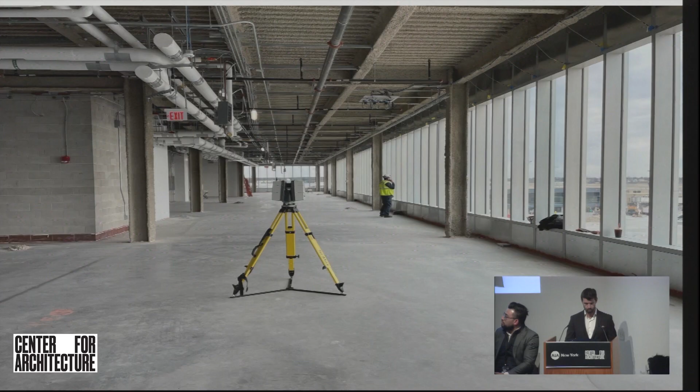The scanners we use are based on what we call line of sight. These scanners are not X-ray—they can't scan through walls or ceilings to see how buildings were constructed, but they take highly accurate measurements and have a very long range. Scanners are moved around to different parts of the building to get the coverage we need. The simplest way to think about it: if you were standing in a room like this, what you can see with the naked eye from this spot is exactly what the scanner will see. So we move the scanner around until we get the coverage we need, whether interior or exterior.

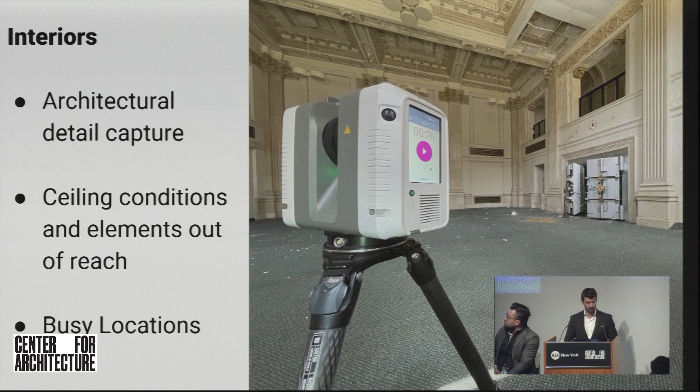Now the scanners can scan in pitch black. They don't need ambient light in order to capture the level of detail that we're looking for. To take photos, they would require ambient lighting, and it's important to understand when we have a conversation with our clients, what are we looking for? Are we interested in photography as well, high definition imagery, as well as capturing the detail to build our drawings? It's important to understand up front so that we understand the type of lighting conditions that we need and what we're looking to accomplish with that particular scan.

So, keeping this to 15, 20 minutes so we can focus on the presentation, but that's a quick overview of the way the scanners work, okay? How we deploy them in the field, what we can scan, what we can't scan. So that hopefully gives you an idea of phase one in terms of collecting the data.

Once we have the data, what we're left with is what we call a point cloud, and that's exactly how it sounds. It's just a collection of points, millions of points in space. Those points don't know, however, if they're part of a wall or a door or a window or somebody who walked in front of the scanner at that time. We just know that we have an accurate measurement with an accurate XYZ coordinate, and that is what we're using as our guide to go build those drawings or build that Revit model.

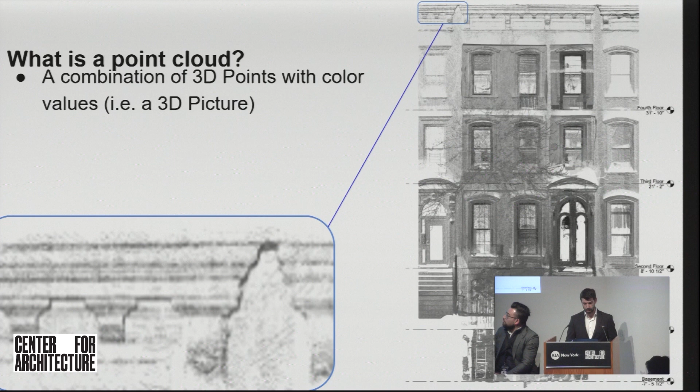Quick example of a site scan. What you're looking at there is the point cloud overlaid with the photos, in this case in color.

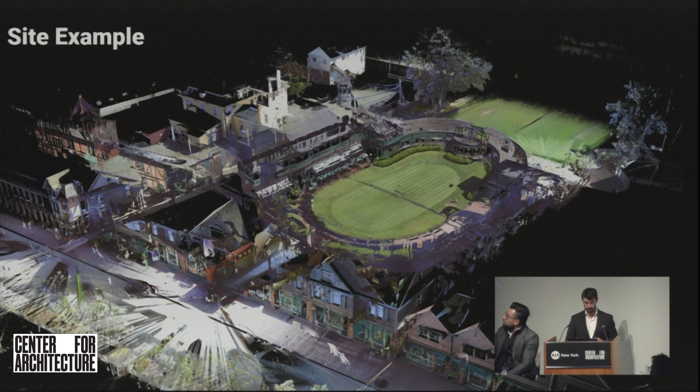So once we've scanned the building, we have the point cloud, we have to go through a process called registration. That's where we get the data cleaned up. We remove anything like reflected surfaces, anything the scanner captured that we don't want to see. We get that ready to model and bring into Revit or CAD. That's a process called registration, and I'm not going to spend too much time there. That's more behind the scenes. It's an important step. It's something that we do internally, but there is a middle step before we go from scanning to production, and it's important to understand that.

There is no magic button, so to speak, that turns a point cloud into a set of drawings. This is still being done one wall, one window, one door at a time. If anyone has questions on when that is coming, I'm sure in the near future, but as of now, not as of yet.

Multiple different file formats, the files that we can provide to clients. Not everyone is using Revit and AutoCAD. Some are using programs like SketchUp, Rhino, Vectorworks, ArchiCAD. So we have the ability to import into different software platforms.

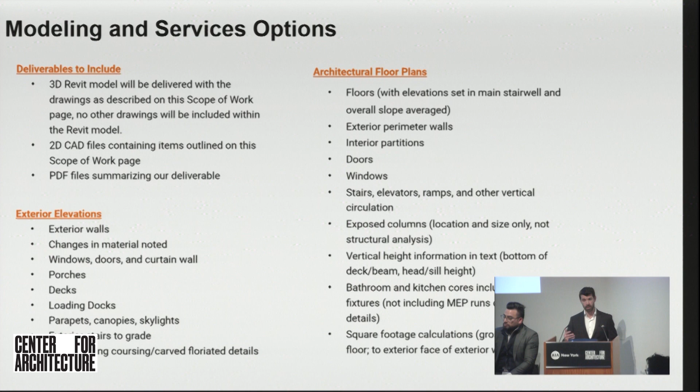Six months later, I might get a call and say, Paul, that building we asked you to scan, I know I only asked you for floor plans, but we need the RCPs, can you do that? We don't have to go back and rescan. We have that data and we have it forever. So we can always add on to the model later on down the road, depending upon if you're unsure what you might need at the time.

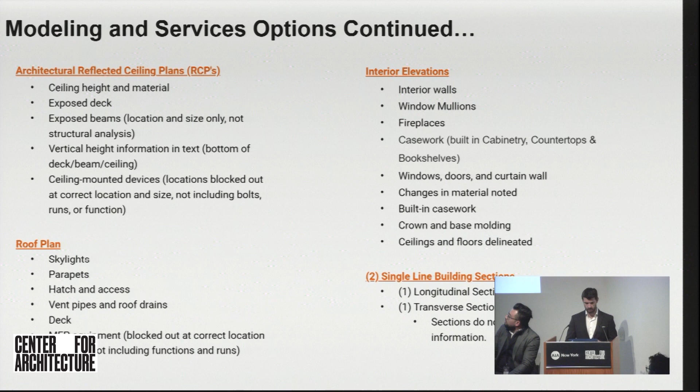Reflected ceiling plans, elevations, sections, roof plans - this is all part of our different deliverable packages. So you choose your menu, so to speak.

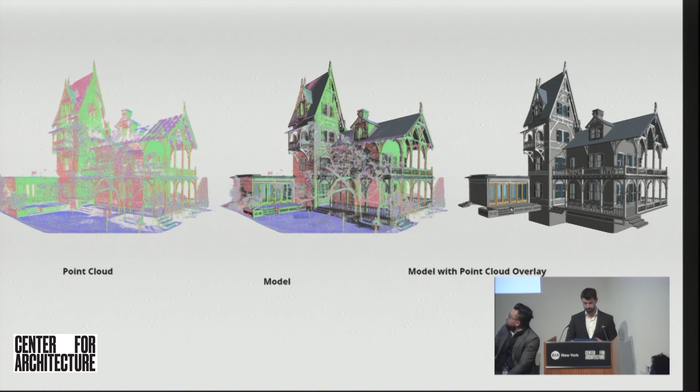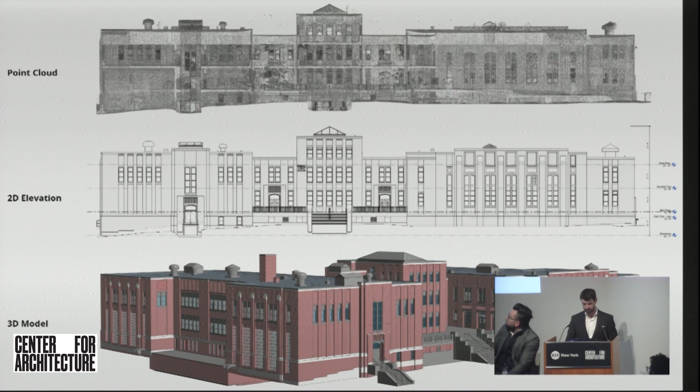Some examples of point cloud, and then modeling, and then overlaid with the color data. Some examples of elevations and how we move from the point cloud all the way up to a 3D BIM model if required.

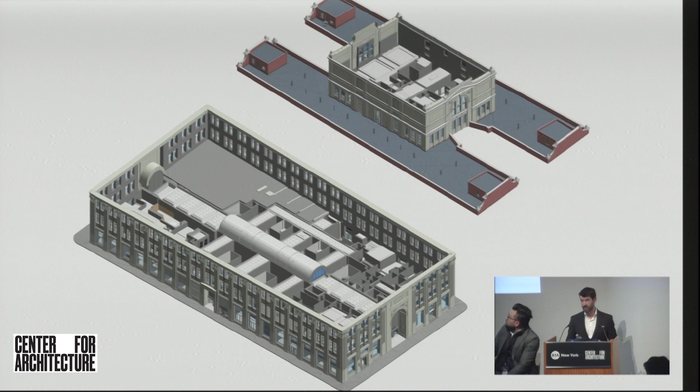I'll show you a couple of examples on building information models here. LOD, important, I'll mention that. Generally speaking, our standard offering, we model to about LOD 300. But again, that's up to you. Most of our clients are acceptable with that level of LOD, but if we need to go higher, we can always do that.

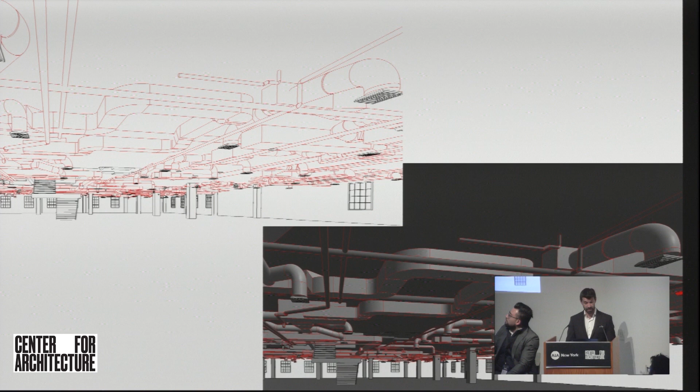MEP, we do a lot of MEP modeling, be it above ceiling or below ceiling, and with the integration of our parent company, GPRS, we now have the ability to do extensive MEP modeling. We're doing a lot more of that lately as well, both above and below ceiling.

Some examples of historical preservation work. We do quite a bit of work for projects that require LPC approval, and we'll talk a little bit more about that when we get into the drone survey.

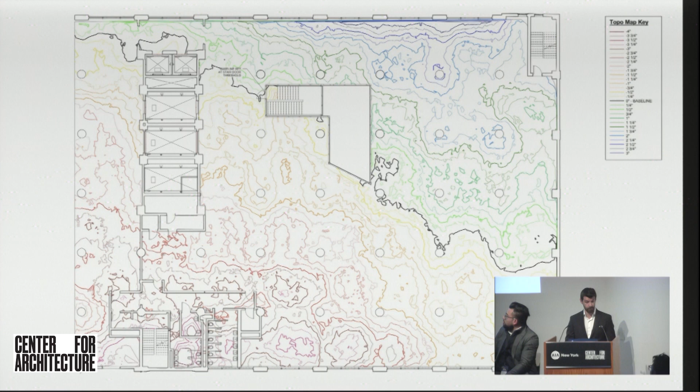Deformation mapping, that's another deliverable that we offer our clients. These are topography maps, so to speak, where we can do floor flatness analysis. As long as the floors are clean and broom swept, we have the ability to scan the floor slabs and then produce topography maps showing different tolerances depending upon what the client's looking for. This is often used for lab spaces, situations where we're really placing a premium on floor flatness. We can offer this for the slabs as well as the walls - same concept applies, just on the walls where we can show you where the deformation is taking place.

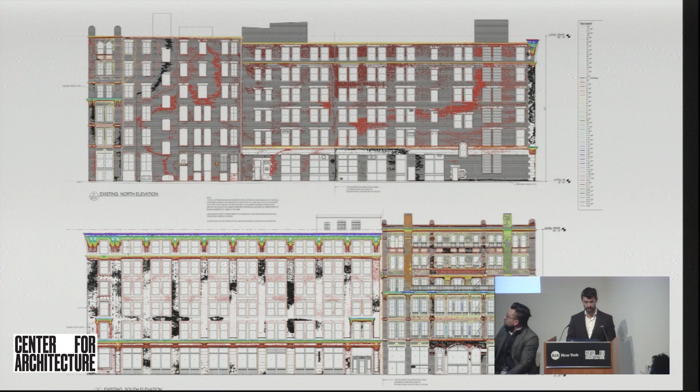Additional deliverables. So again, as I said, there's two things when we scan a building. We're providing the CAD drawing or the Revit model as a deliverable, but part of our package as well is going to be to provide the scan data as well. That's what the scanner saw at the time of survey, and this can be very helpful if you don't want to have to keep going back and revisiting a site.

Be able to pull this right up from your desktop, walk the site virtually, snap some basic measurements. Obviously, for precise measurements, you're going to want to defer to the drawings, but this can be very helpful. While it looks very much like a Google Street View, this is the point cloud overlaid with the photos. So embedded within these photos is the actual scan data. This can become very helpful to snap some basic measurements, maybe share this with a consultant, a sub who's involved with the project, who's just trying to get a better sense of the space without actually having to be there.

And this is available both to house locally on your existing machine, or there's some cloud-based offerings as well to make it easier to share amongst the teams.

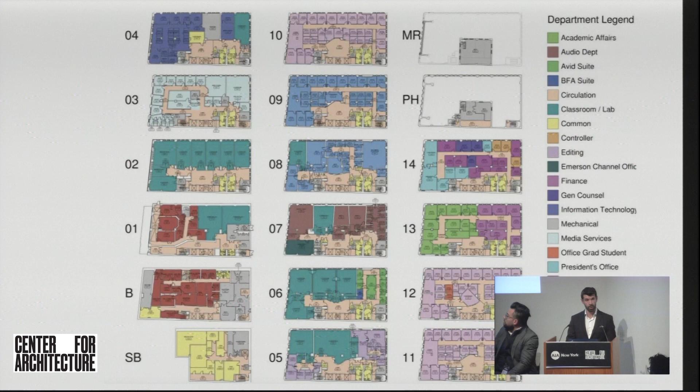Area calcs is another deliverable we do, usually for education clients, K through 12 or higher education. A lot of our clients are asking for legends based on departments—how do we take that data and allocate it to specific departments, whether schools are filing for grant money or want to show specifically by area. This is a deliverable we do for a lot of our academic clients.

Last but not least, I want to talk about drone surveys, because those were an important part of the Pinnacle Penthouse project. Drone surveys are used for areas hard to reach with ground-based terrestrial LiDAR, either because they're not safe or we don't have a clear line of sight—that's where our drones come in.

It's important to understand that drones use something called photogrammetry, not LiDAR, so the accuracy is going to be different. That's not to say we can't still produce drawings from that—we'll talk more about that—but it's important to understand there is a difference between LiDAR and photogrammetry.

So these are some situations where we're using aerial drone imagery. Here's an example of a specific building where you can see each one of these triangles is where we had a photo taken from a drone.

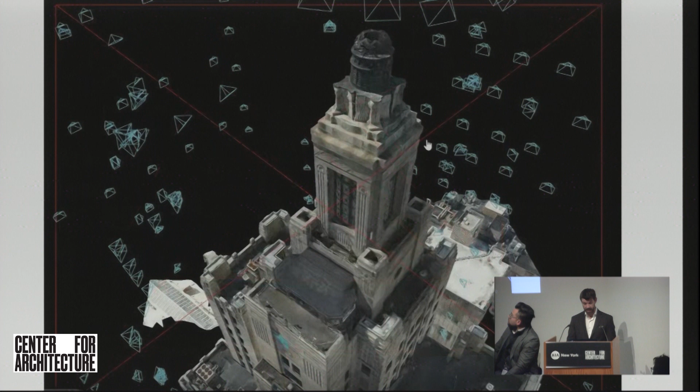This can be used in a number of different ways, whether we're doing forensic investigation or facade analysis. This allows you to zoom into specific areas on the building if you're doing restoration work, with high definition imagery, even to the point where we can create a searchable database, tagging specific items on the building so you have an accurate database of everything you're looking for.

So there are a number of different ways we can use drone photography, and we'll talk about how we used that specifically on the Woolworth building.

And I think that was exactly 15 minutes.

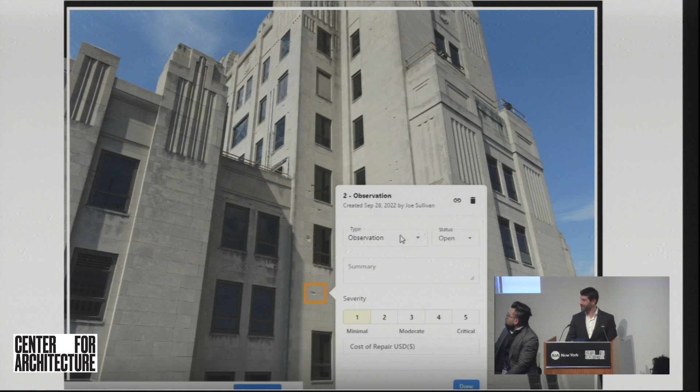With that said, I'm going to save questions for the end. I'm sure you have some—I gave you the higher level version of a normal presentation, but hopefully that gives you a better idea of how we move from scanning to modeling, the steps involved, the limits we have, what the scanners can and can't do, and the different deliverables we can offer.

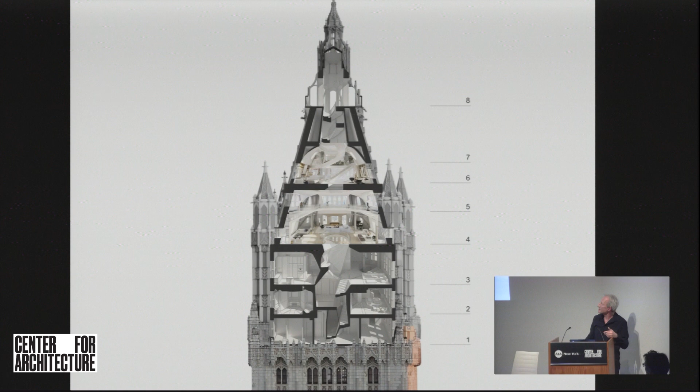It's absolutely incredible. And of course, I was fascinated to see all the early images of the 7 or 8 story interior of the Pinnacle, and to get inside and see the steel structure that had been supplemented somewhat by the engineers who had needed to restructure portions of the building. Actually, the only thing they needed to supplement was the structural steel at the summit. This was viewed as a bit inadequate for contemporary structural engineering, although the rest of the building was perfectly adequate.

So we were interested in this notion of framing elements of the steel structure as this kind of extraordinary physical artifact in the technological, commercial, and economic history of New York City.

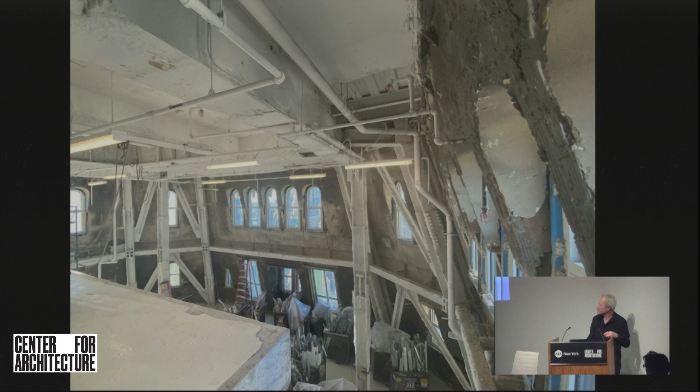When we took over, the project was at this sort of white box stage. But in order to get the scan data, we felt it was important to strip away the sheetrock finishes that had been installed for the sales process, so that we could be looking at the face of the original terracotta that could not be moved, as the exterior envelope of the building. So the whole thing was stripped of its superficial sheetrock finishes, and then existing conditions documentation came in.

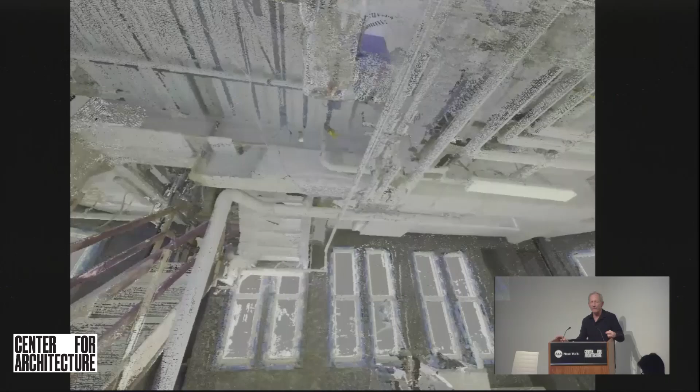Obviously, we need some of this material to be stripped away. We wanted to get back to the skeleton, and of course, they deliver whatever specification you have — some people need every duct and every sprinkler pipe. We wanted to have just the structural elements, the envelope, the windows, and the floor slabs in our data. So that's what they delivered to us.

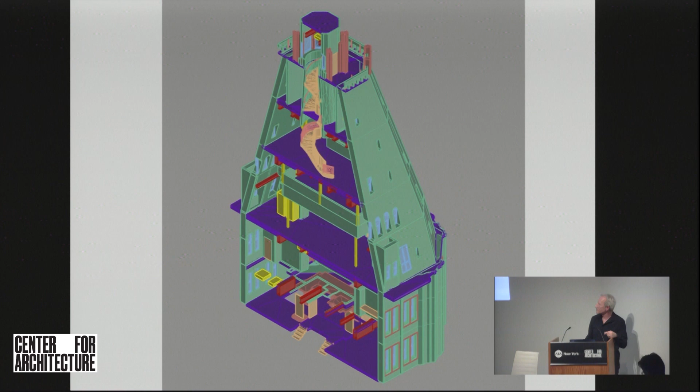They delivered a Revit model that accurately located all of the structural elements, and we got to work converting that into a three-dimensional architectural design using their... this one's not working. We've got— there we go, sorry.

So it was this process of being able to work with a very accurate structural description of the building on a very, very intricate and complex three-dimensional envelope, with the sense that the kind of precision we wanted to achieve in the actual finished product could actually be realized.

I'm hoping I can get this video to play, but it's not working.

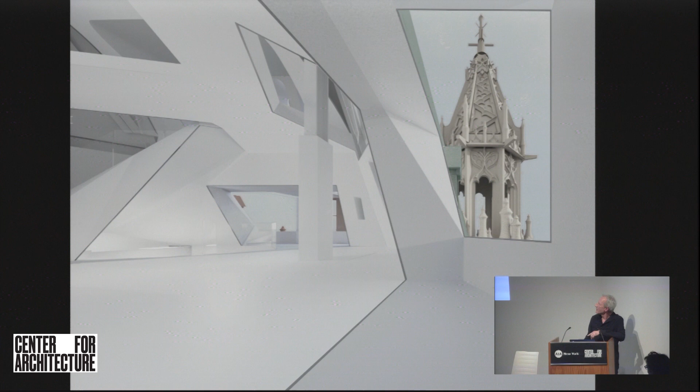The opportunity to work in a building that is on the National Register of Historic Places, and that has this extraordinary structural envelope, structural skeleton, and these amazing steel connections that are themselves pieces of history, was a really amazing opportunity. And as we worked on it, we became more—

The purchaser got to be very interested in the prospect of restoring some aspects of the exterior, which of course is a hugely expensive and difficult operation. So we did a preliminary design study of what would be involved in restoring particularly the top of these four corner turrets, which are really remarkable works of architecture in their original configuration, but had been stripped and clad in aluminum in the 70s before the building was landmarked.

Originally they were open, you could see right through them. They had this diaphanous transparency, with astonishing Gothic ornament that, of course, is completely invisible from the street. You really can't see it, but from inside the Pinnacle apartment, they're actually very disappointing in their current configuration. We wanted to look at what would be involved in bringing them back closer to their original configuration.

And so here you see — this is a video too, if I can get it to go — you can see what was done in the 70s if you look at those corner turrets now. Just a cartoon version of the original Cass Gilbert design. It's a terrible disappointment when you see them up close.

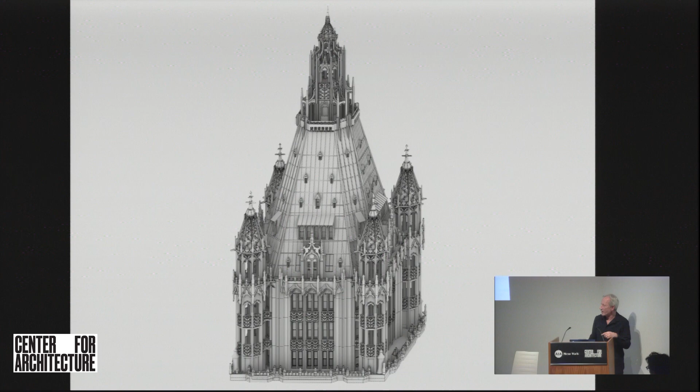So I'm ending just with this kind of montage of the point cloud. You can move through this point cloud as this amazing diaphanous sort of scrim of points, and it's miraculous, frankly, that you can work through the space, document all these points, convert it to an accurate.

Three-dimensional model. We sort of just rediscovered some of this material as we were invited a couple of days ago to participate in this discussion, and it'll be fun to get back into it in the coming days, because the richness, as an architect, looking at the ability to capture a three-dimensional envelope of space, and the process through which it's done with the point cloud, is really an extraordinary thing.

So I wanted to give you a little glimpse of the use that we've made of existing conditions. Superb technology. Thank you, David.